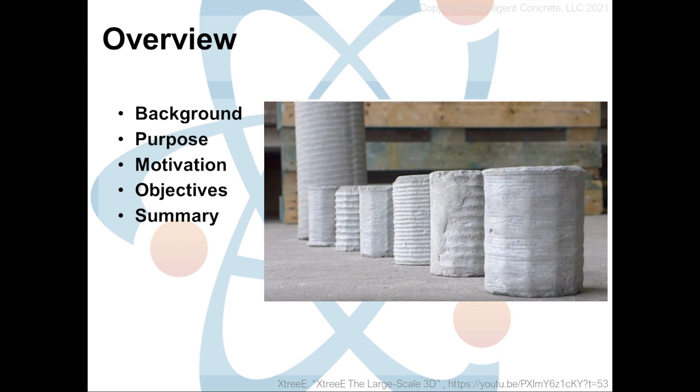So like I said, my name is John Belkowitz. Got a PhD in mechanical engineering with a specialty in nanotechnology of concrete, and that is just the tip of the iceberg. There's so much underneath the water, so much that I've done over the last 30 some odd years in the construction industry that adds to the experience that we have in Intelligent Concrete, and it speaks volumes.

And what Whitney and I were going after when we started this, and granted, I started in the United States Air Force and went through schooling, worked through the commercial industry, but what Whitney and I wanted to do with Intelligent Concrete when we created it some 12 years ago is combine what we saw in some of those university basements, some of these technologies that never see the light of day, or even private industry, and then of course the testing techniques and methods that you'll find in these commercial labs, and combine that with what is needed for technical transfer out in the field to create this combined level of testing and technical transfer. And suffice to say, we are concrete enthusiasts.

So here are our 3 objectives, and I'm not going to belittle you in reading these out to you. What we're focusing on is building a foundation and then identifying what is making this change happen, that the foundation is now forming into a pretty nice structure. And then finally, we're going to start putting the roofing on, the cladding on, and outfitting the house a little bit with case studies that have been done. Ultimately, what I want to do is create this house which contains the very ideas of 3D printing concrete, from its birth, its adoption, to that saturation in the industry, which of course is the future.

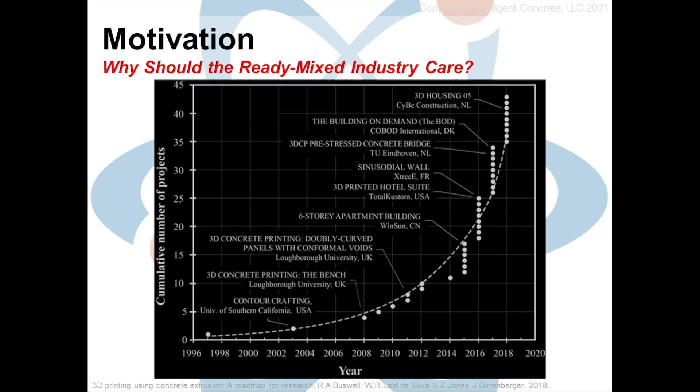The recent techniques, materials, specification activity, everything that really lays the foundation, and how it all began. I mean, we can go back as far as the 1950s to talk about this comic book or this science fiction story that talked about a molecular spray for building structures. And then in the 1980s, we started seeing these inventions, these patents for 3D printed design. And then, of course, in '88, we have our first fused deposition method in somebody's garage.

And doesn't it always start like that, in somebody's garage, with this type of construction that we see today, the early footprints, if you will. And funny enough, one of the founders of one of the major 3D printing companies out there with cementitious materials started out in his mom and dad's garage. So it's funny that a lot of these stories start out with the founder having a really cool idea, not knowing the material and not knowing to say, I can't do that, and just figuring it out on their own.

And when they did that, it was a 3D printing platform that might look something like this, all the more realistic. It was probably a lot prettier, and we're going to see one here in a second. But I wanted to break it down for you real quick because we have some very important components. The first one is our cementitious mixer, and you're going to see some of these definitions on the next slide. That could be anything from a ready-mix truck. It could be a vertical shear mixer or a rotary mixer. It could be a bucket mixer, and you're throwing the bucket into an auger.

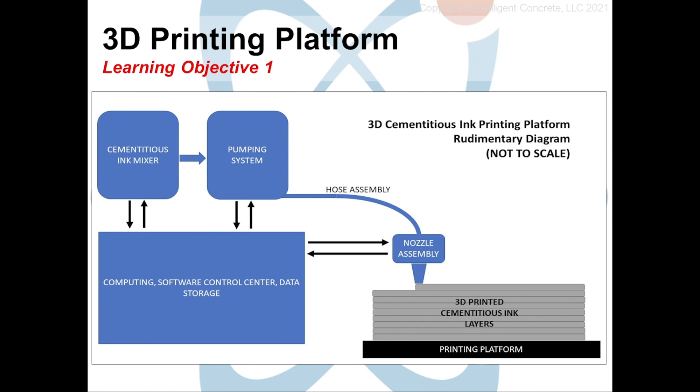And of course, we have our printing platform that could either be stationary or moving that hosts that 3D printed material. And again, please bear in mind, this is not to scale, but all of that comes together for our additive construction or additive manufacturing system, which is normally user controlled or computer controlled for the placement of material to make that three-dimensional structure. And what we're going to get into here a little bit is the importance of what I like to call cementitious ink.

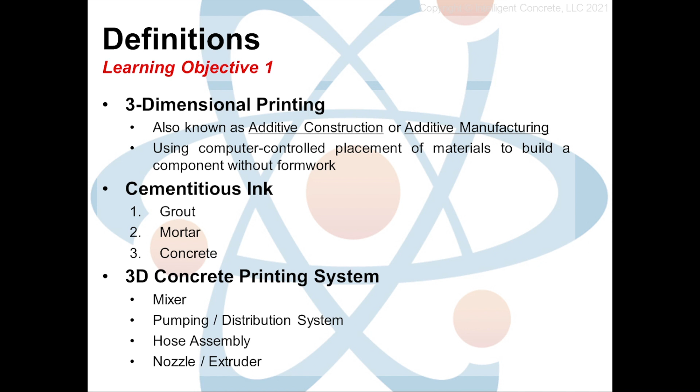And I believe in the ACI 564, they're changing that. I started off using the phrase cementitious ink to purposely piss people off. And it did, and it got folks excited, which I love. But now it looks like either cementitious materials or something else is going to be used. But ultimately, what we've seen with 3D printing is this evolutionary step from a non-sanded grout to a sanded grout, and then a mortar, and then a concrete. And where we're at right now, this concrete phase, is why I'm giving this presentation. It's why it's so dang important.

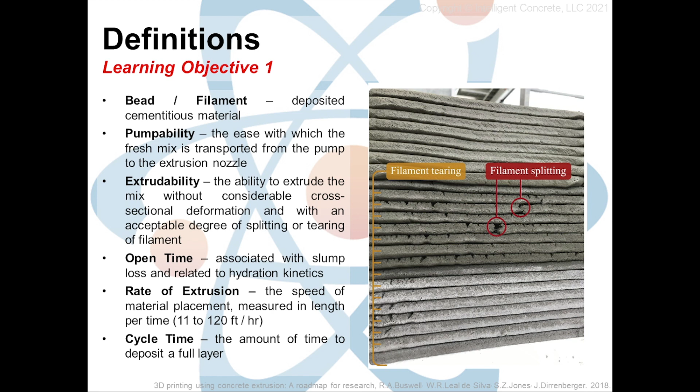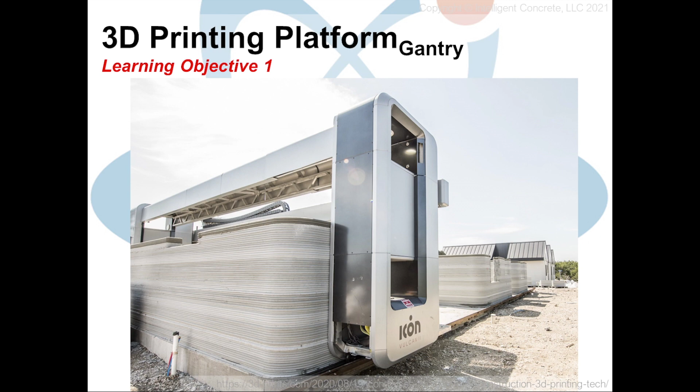Now, just so we know, I'm going to include two more slides here. I want to include Apis Cor, and I call them CyBe construction, but I just want to show maybe even one from these different types of printers. Right now, this kind of looks like a flippin' sales pitch for Icon, and I want to make sure that we're being altruistic about this and not making a sales pitch for one company. That definitely was not the intent. So, what has driven this conversation that I've had with a number of people is it's not the 3D printers.

I mean, come on, they are just absolutely beautiful, and the software and everything is just absolutely beautiful. But what I feel is driving this need for the ready-mix provider industry to care is not the jazziness of the printer. It's whether or not the printer can handle concrete. Now, there's a lot of folks that are using 3D printing concrete structures. Now, to me, that's just not accurate.

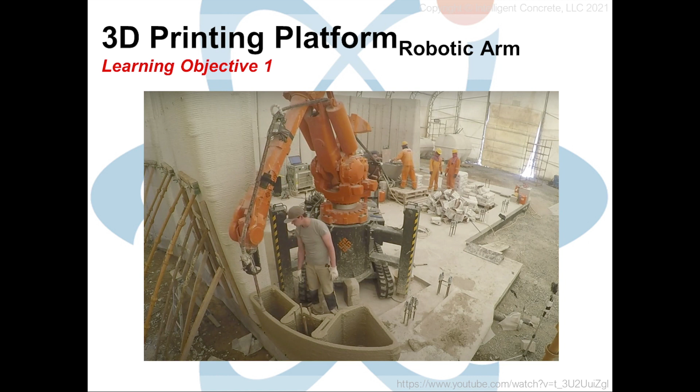Concrete is a very specific thing, and what they're basically using is either a non-sanded grout or sanded grout. I mean, even to suggest a mortar is very difficult. In some of the mortars that I've used in the past, there has been up to 3/8 inch aggregate, if not on purpose, just because of what has been in the mixer before, especially if it was in a truck. And a lot of these pumping systems cannot handle a 3/8 inch aggregate that folks are using for these neat or non-sanded or sanded grouts.

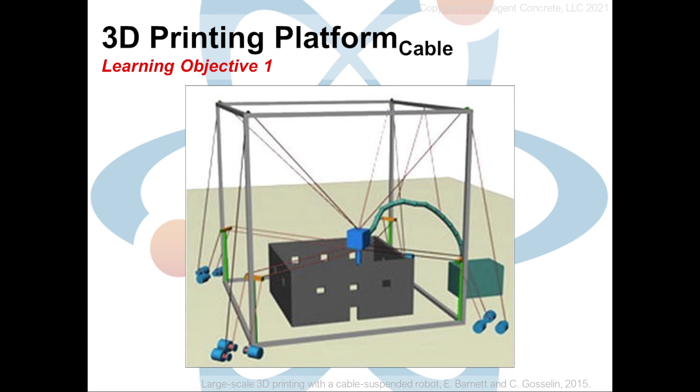Because again, when we're talking concrete trucks, you can't control what's in the truck. You can't control if there's one piece of 3/4 inch aggregate in there or one piece of 1/2 inch or 1 inch. That's just the reality of the contamination that we're going to see in the trucks. And that's not meant to be disrespectful. But the emerging method, which is allowing us to get into the concrete industry, is the fact that a lot of these pumping companies or 3D printing companies are trying to get to a 3 or 4 inch nozzle. And we're going to look at one of those case studies today.

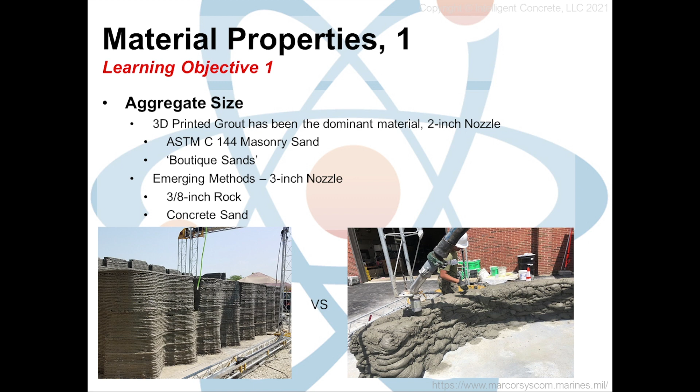So I wanted to show you some of the cementitious ink, and I wanted to talk about the important features. And the first feature, of course, is the fresh properties. The big question is: is the mix pumpable? A lot of these 3D printing companies don't have folks that specialize in cementitious inks, grouts, mortars, or concretes. So for them, a lot of the knee-jerk reaction solution is adding water to make something creamy and dreamy and pumpable. The next thing is slump life.

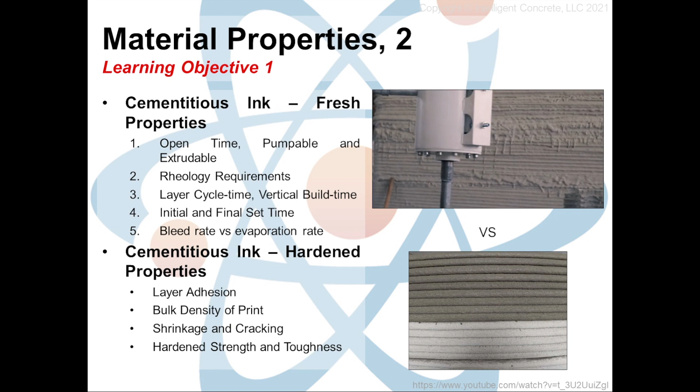We can have pump assemblies that are anywhere from 5 feet to 500 feet long. And when you look at a lot of these systems, the curves depend on where the nozzle assembly is located in the XYZ coordinate. So there can be a change in the free fall of the material and the curves in succession, I think is a better way of saying it. What we want to see in our pumping system or in our output is this bead that has the same look to it. It has the same height. It has the same creaminess. It has the same texture to it.

You have layers on the bottom that are starting to set up and get strength so they can support the successive layers, hundreds and thousands or tens of thousands of pounds above it. So you've got restraint through all those layers. It's almost a gradient, but then you also have the drying phenomena and the volume change that's adding to that.

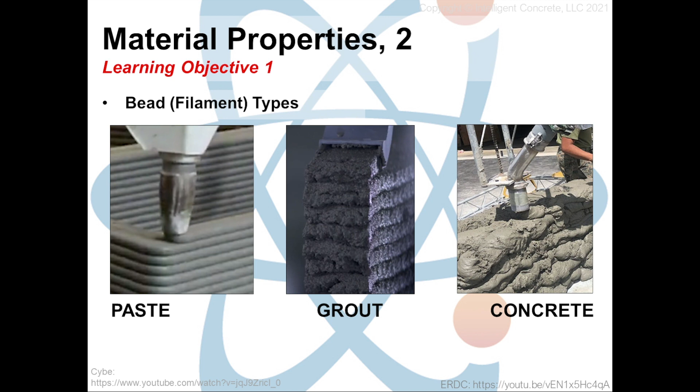We all know that concrete has that ability for successive adhesion between lifts, but more so, this structure relies on it. So we can't just take it for granted, especially when we have 5 to 15 minutes between lifts. Who knows what could be deposited on that surface that can compromise that adhesion?

That being said, RILEM has done a great job of putting on presentations. The Precast Institute is giving some great information, but I believe it is ACI 564, I'm happy to be a card-carrying member of that committee, that is doing a great job getting information out there. Everything from mix design to asking the question of whether this is a viable option. They're just doing an excellent, excellent job. So keep your ear to the ground and don't be afraid to head over to the national website to see what ACI 564 has been doing.

And one of the things that came out of one of the RILEM talks, and soon to be coming out of ACI, is this question of, is 3D printing a viable option for our construction site? As cool as it is, all these years that we've had this awesome activity, it's rare that people ask, is this a good idea when we get into the real concrete side, the practical side of the industry? And what that means is, is this cost effective, and do we have everything that lines up with it?

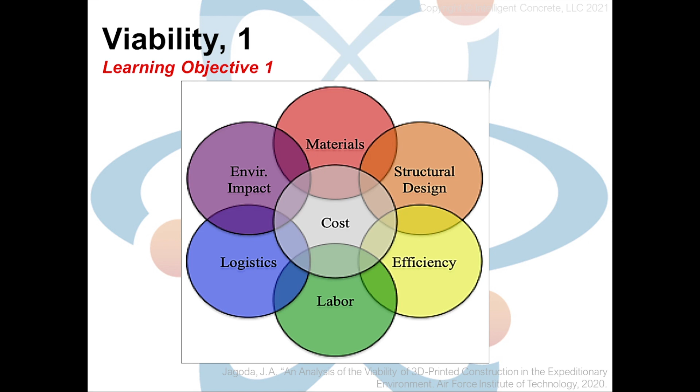A lot of these 3D printing companies are saying that they can print a house in less time and with less money than current construction, timber frame or concrete. And nothing against their marketing campaigns, but some of them are lines of BS that are not entirely true. Either the materials that they're using, or the cost that it takes to get the equipment over there, or the delays that they have because, hey, some of these are prototypes. They're not meeting that speed, that efficiency, or that cost. And those are all the things that we do have to consider, not only in standard construction, but also 3D printing. And there's this wonderful paper published through the Air Force Institute of Technology.

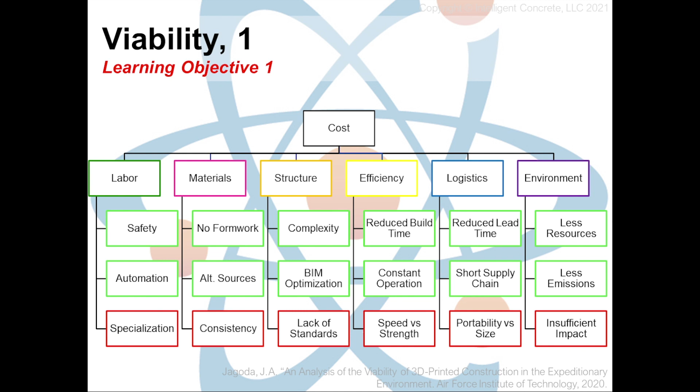The link, or the citation, is below, and it asks these questions. The paper really goes through these different questions of, all right, do we have the necessary materials? Let me just go on to the next slide. What we've done through ACI 564 is start generating these questions that lead to either yes, no, or fill in the blank, which helps the end user decide: is it really worth it to do 3D printing, or am I just doing something really fun and really cool?

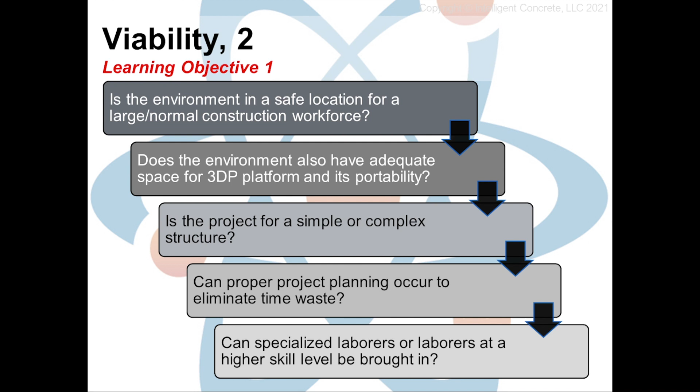And that's what these lists on the next slide really dive into. First of all, are we even capable of making this structure? Do we have the room? Do we have the materials? Do we have the labor? Is it safe? And what we did is we created an example case study.

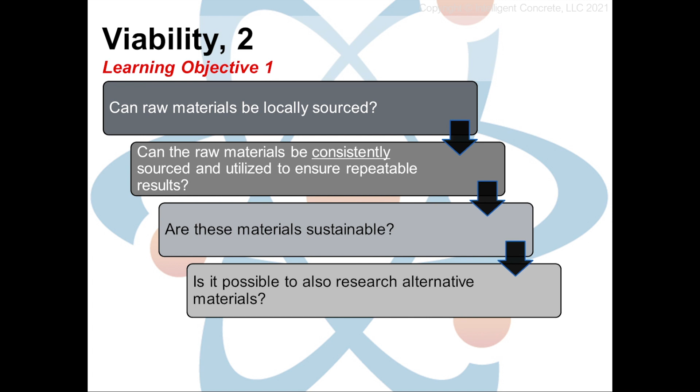We had a fictitious job site in Vietnam. It was a one-story single-family home. That concept is being used by a few companies to do sustainable and durable housing in remote areas hit by natural disasters. The number of homes we want to build is 5. The closest raw material provider is 150 miles away, which for a lot of these job sites might sound like a lot, but it's absolutely beautiful to be that close.

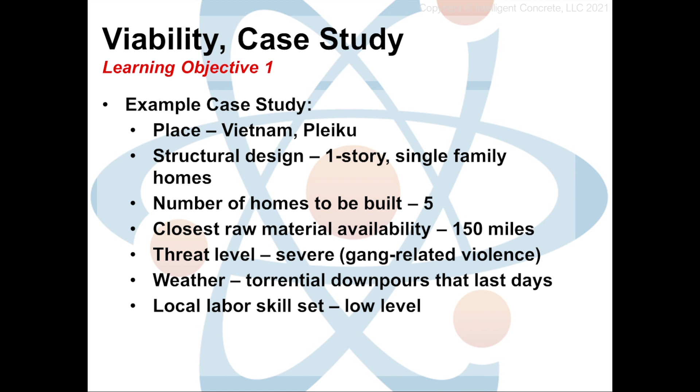The threat level is severe, so we'll probably need some type of security measures, either a security company to come in in plain clothes or some type of secured perimeter. The weather will have torrential downpours during construction, and there's a low level of local skill set. So when we go through the system that I just showed you,

we asked the question, is this a safe location for printing? We always ask that on our construction sites. Is it safe to do the job? Is our equipment going to get stolen? But when it comes down to 3D printing, the whole job site is reliant on one big piece of equipment.

In my time in the military, I've been all over the world, through different parts of different countries. And there are times that we laid pallets down out of a C-130 and came back to find everything had been taken, everything to include the pallets.

So it just happens that in this part of the world, we might need some security to protect the equipment. Even if one wire is ripped off that piece of equipment, that's going to require somebody to go into a box and take out materials to repair it. That costs time and resources, and we will not have a huge stockpile down there to begin with.

So is the environment accessible for the space? Yes, for the homes that we want to build. Is it simple? Yes, it's a 500 square foot facility. Can proper project planning occur? Of course. And then do we have enough locally skilled folk?

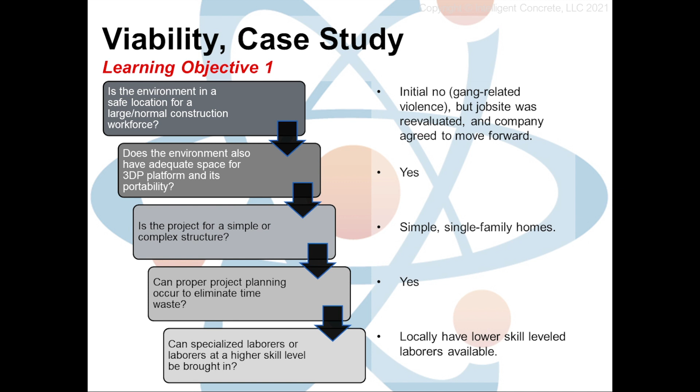The great thing about 3D printing is that at a certain point, when you believe in your 3D printing system and the material itself, it should be click and go, and it's just maintaining that system throughout. So it's something you should be able to facilitate with locally low-skilled folk. After that, we do have material within 150 miles, so we can get stuff shipped in.

Can the raw materials be consistently made? There's unfortunately not enough information, but if there's a place to buy materials, there should also be a place to ship materials, and we can always have materials shipped in, which of course reduces the economic value. Are these materials sustainable? In this situation, there's not enough information. And is it possible to research alternative materials? Absolutely.

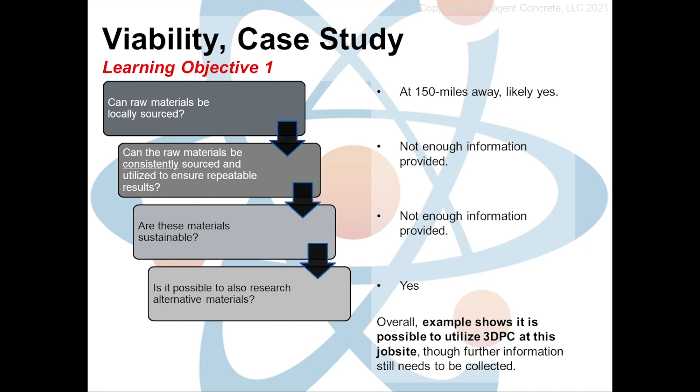Now, this is only a draft, so if you're telling yourself that this seems like there's a few holes in this, or it's not as clear as you would want it to be, that's a fair assessment. And while this example does show a positive direction for 3D printing, the entire system is currently being worked on, and I'm excited to see what the future holds for this.

So, describing emerging ideas in 3D printing: why I say emerging ideas is because in the last 7 years, this idea has taken off. And in my opinion, based off of the research that we've done, it has been kicked off by certain things.

One of the things that I saw was in 2014, there was a major contribution from NASA to Contour Crafting to start building three-dimensional structures on the moon with cementitious ink. Or I think it was magnesium oxide based, but it really started kicking off the popularity of the concept.

And of course, social media helped with that. But then in 2018, we see that the Marines and the U.S. Army Corps, you saw it in the news, CNN, Fox News, CNBC, are building these barracks using 3D printing, and they called it concrete, but at that point, it was more of a grout.

And then in 2019, where I see the major change is this use of this 3-inch nozzle for bunkers by the Marine Corps. Now, man, was that amazing. But again, it wasn't really this automated system. There were a lot of folks working on that project, and we're going to see some of that here in a little bit.

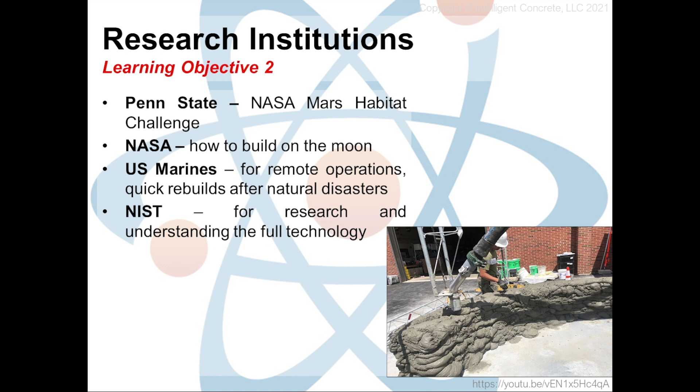And in my opinion, these are the top institutions that are really taking off with these 3D printing concepts. Penn State, NASA, U.S. Marines, and NIST are all doing great work. And with Penn State, they're the ones who are focusing on the Mars project to create a sealed, watertight container that was printed. It was also Colorado School of Mines. There were a few universities that were going after this challenge, but it was Penn State who won. And then, of course, NASA, who's going for this lunar concrete.

And, proud to have been part of the initial stages of this project. It was, man, that was one of the pinnacles of my life. I remember when Whitney said that I had a phone call with NASA to do some consultation. I said, no, Whitney, it's not NASA, it's NAPA, National Auto Parts Association. And I was curious why they wanted to talk about concrete, but then Whitney said, no, love, it's NASA.

And right now, NASA is working with ICON to create not just habitats, but also 3D printed launch sites and landing sites. It's very exciting. And I remember reading that we wanted to have our first lunar structure by 2030, which would make it only 8.5 years away, or 8 years and change away. Don't quote me on that. There are articles through NASA to check out.

The next one is the U.S. Army Corps and the Marines printing their bridges. And these I wanted to focus on because of the amazing work that they're doing with the Marines. There's a no-quit mentality, starting off without the most sophisticated software and then teaming up with some of the best minds in the industry to create not just these footpaths, but also a baseline for engineers of the future. And that's what I love about what the U.S. Army Corps and the Marines are doing.

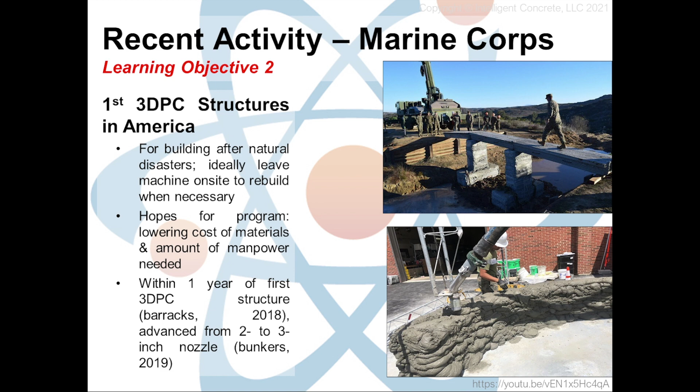And all of them are part, especially the Army Corps, of ACI 564 and contributing. So just great what they've been able to do in a very short time, not only successfully printing structures, but also developing the standard operating procedures for moving forward. Also, let's get into those case studies. That's the fun part.

So the one that I absolutely loved, and this is just so beautiful, you look down this almost panoramic view of the barracks that were built in Champaign, Illinois. They printed two halves of barracks without covering in 24 hours, and that's very important. There are a lot of these companies that are printing in a bubble. And printing in a bubble is a very safe thing to do. It takes time and it wastes money, but you don't have to worry about controlling the environment or what the environment is going to do to the print, which is a random factor that can destroy the entire structure.

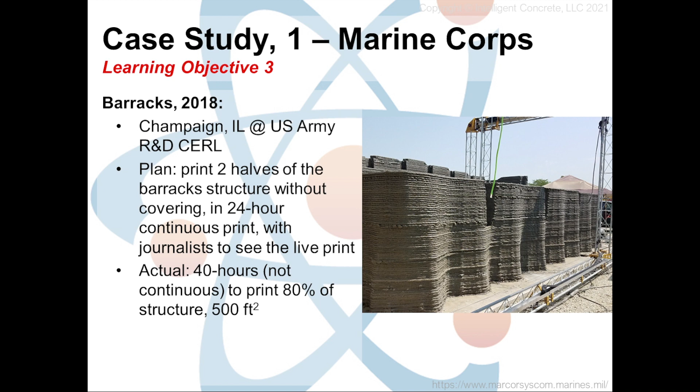You can print in a bubble and just print and go, and then pick up your bubble and move it to the next structure. What the Marines did here is they printed it uncovered, unprotected, which is expedited, it's real world, and of course it makes you more expeditious. You don't have to carry as much around with you. The actual structure took 40 hours to print, 80% of it, and the structures were 500 square feet for barracks. The issues that they had with this is that the material wasn't that great.

I say concrete, that's what they called it, was drying too quickly. They had a lot of equipment failures. And because of the drying, they didn't get a nice print. They had problems with either pumping issues or the lines being clogged. But the consistency and the quality of the flow was lacking. That being said, they still printed.

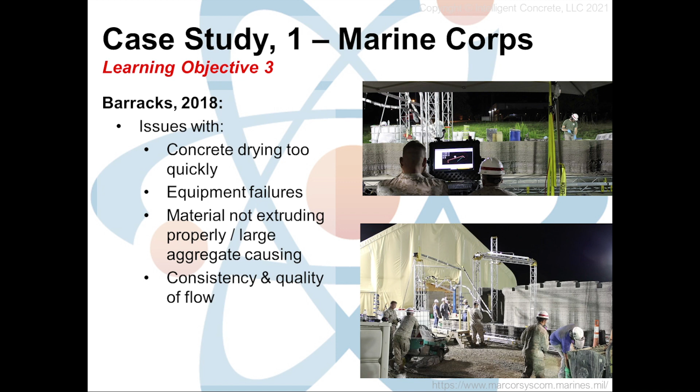Now, the next major project that they did was a bunker in 2019. And I remember calling Brian Green, and of course now it's Eric Krieger who's taking care of it from the U.S. Army Corps. I was just complaining to him about how ugly this was. And I'm picky, I get it. I married up in my life. I always wanted to see the best, not only for my personal life, but business as well as the concrete industry. And when I look at this picture, I don't see pretty.

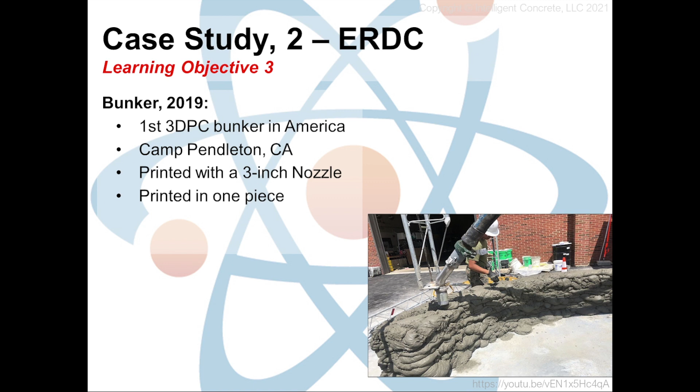And I called Brian Green about this. If you don't know him, he's a great guy from the U.S. Army Corps, one of my mentors. And he said, hey, man, are you kidding me? They did this out in the field with no trained people in either concrete or 3D printing, and they did it with locally sourced materials. The fact that this bunker was a success tells you that this is possible for a larger industry. So why don't you show a little bit of respect? And then he went on and on. So this is an amazing success.

And I didn't realize that, but after that berating from Brian, it's called B squared, I was blind. I can now see the value of this. And that's why everybody in the room should see the value in it too, and where this industry is going, because we're making those next steps to it becoming viable for our construction industry.

And of course, the next thing is this house that was printed and is being sold by Icon in Austin, Texas. Icon has done a lot. You're going to see another structure that they built. The reason why I show this company is because they have no fear in taking that next step. They don't understand what no means. And I'm proud to say that I worked with them for a year in creating the foundation for what is now this growing company. Working with the founders, Jason Ballard, Alex Le Roux and Evan Loomis, there are no apologies in the way that they're doing things.

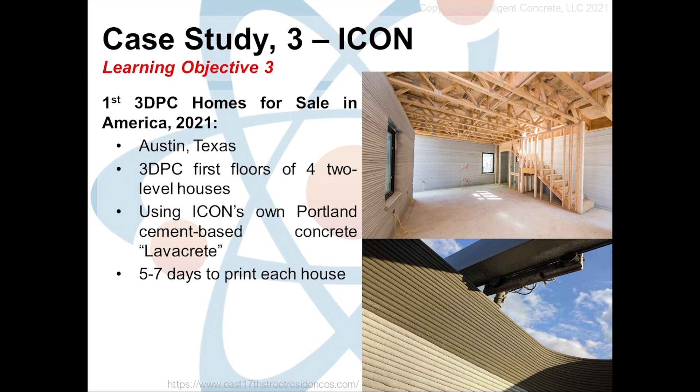But even outside the higher end industry, Icon's initial mission, I believe, was to end homelessness because of natural disasters. This was something created by their CEO, Jason Ballard. And a place that they started this was in their hometown. I believe they built 10 homes, please don't quote me on that. Wonderful article, CNN or Apple TV, I think, did a documentary on it.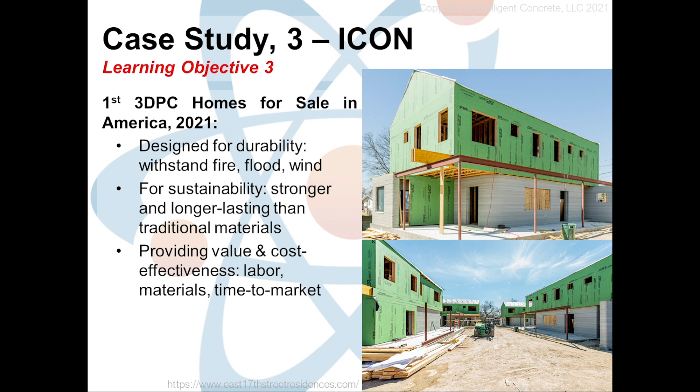They're building these one-level natural disaster-proof homes, 400 square foot, in a place called Community First, which helps people who've been down on their luck, folks on the street, homeless, get back on their feet and build their lives back up. They've also done a project like this in Mexico, where I believe they were going for 50 homes in southern Mexico, and it was the same thing, natural disaster-proof homes and relieving folks who are homeless.

I mean, it's an awesome concept. In places where you don't have either the skill set or even the volume of folks to do labor to build as many houses as they did in a short period of time, this is amazing. Building communities where there once weren't. And I wanted to summarize this: there's an opportunity to give yourself another tool in the toolbox. And I know that, especially for folks who've been doing this for years, my Uncle Richard has been a bricklayer since, I think, 1964, 1965.

And when I show him this 3D printing, he has a very intense reaction. And, of course, as not just a bricklayer, but he does a lot of timber construction, he feels like this might be taking some of the space.

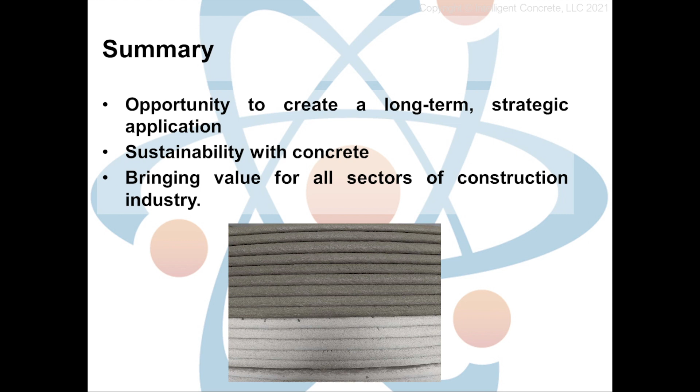And as it stands right now, and before I get into the next part of this or open up the floor for any questions, it's part of why the ready-mix industry should care. As it turns out, and I really don't want to play number games here, but there is a labor shortage within our industry. I've read a whole bunch of reports. I've read about 15 reports now. JT and I were talking about this the other day. The numbers aren't lining up, but the one thing that I do find, the trend, is that the labor shortage has increased compared to 15 years ago, 10 years ago, and 5 years ago.

And that's quality labor. Now, why we should care about this: again, this is another tool in the toolbox for my contractors out there to get the job done, to get that critical path lined up again, and to start getting on more and more job sites.

Outside of that, when it comes to why should the ready-mix industry care, why should the Colorado ready-mix industry care, y'all, we've got some great materials out here. It's rare that folks have this much rounded rock and clean sand left. And with that, those materials are very important for making not only a pumpable mix, but a printable mix too.

Now, as it also turns out, we have a lot of powder to choose from. We have different cements. We have different alternative supplementary cementitious materials as well as cementitious materials. And of course, we're located in a beautiful spot to get some of the prettiest admixtures the industry has to offer. Now, when it comes to it, we can use 3D printing for anything.

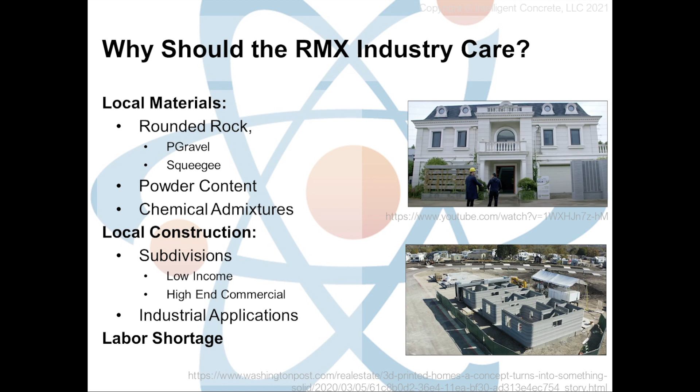And I want to open up the floor for any questions, but the reason why I wanted to give this presentation to you is because I know that within the first few years, you're going to see this technology. It's going to become a huge part of your everyday, and I'll stand in front of that statement every single day.

And the reason why it's important: if you look at most of these companies, they don't have concrete specialists. They don't know how to work with concrete. They don't know how to make it do the things that you know how to make it do, not only on a paper side with our engineers and architects, but also on the Labcrete side and the Realcrete side in our batch plants. I brought this to you today because you are the concrete superheroes.

Now, I'm about to open up the floor for any questions, and I want you to give me the tough questions. I don't mind answering them, and I don't mind being stumped. So I'm excited. I'm appreciative for your time. Let's go ahead and open up the floor for any questions.